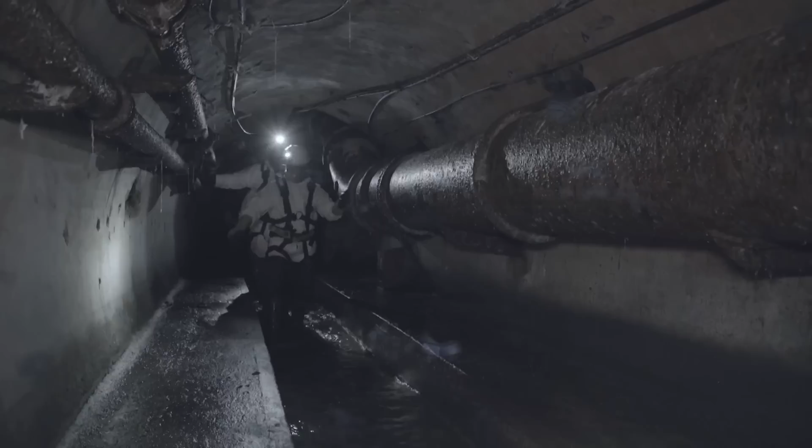This underground labyrinth spreads over 2,600 kilometers, the distance between Paris and Moscow. Hidden and mysterious, and completely unknown to most Parisians. It's a city beneath the city. Actually, underneath each street in Paris, there's a sewer that's accessible. It feels like entering the bowels of the earth.

Like the city above, the pipes below are always on the move. Every turn of a tap, every flush of a toilet, every minute of every day, Parisians depend on the waste they take away and the fresh water they provide. How does it all work so seamlessly?

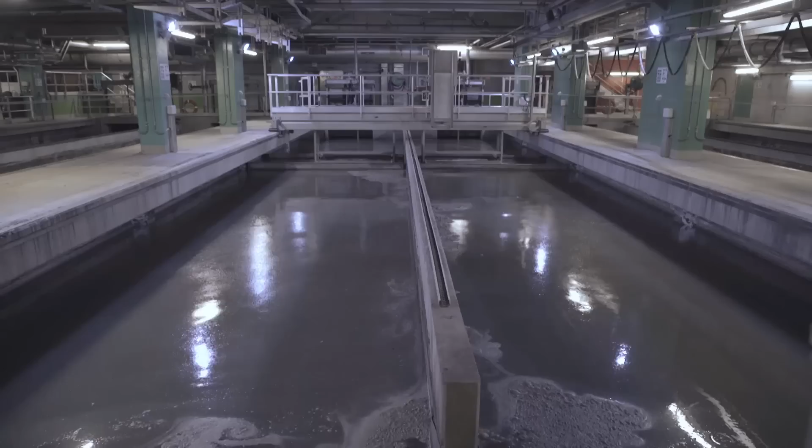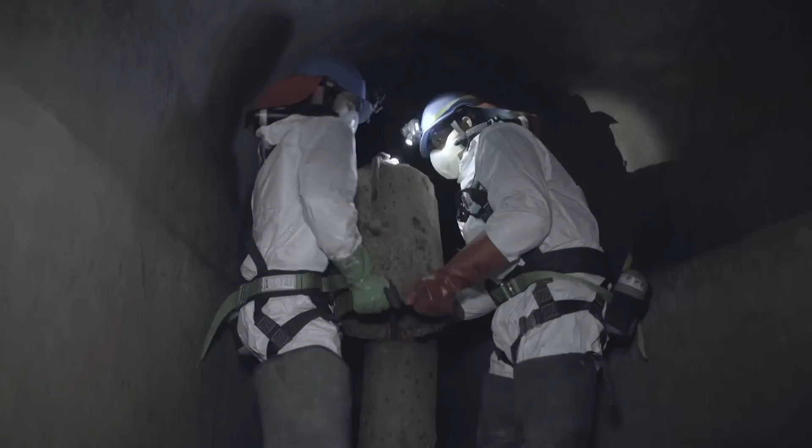Now, thanks to unprecedented access and computer-generated imagery, you're about to discover the secrets of the Paris sewers, where close to 6.5 million cubic meters of wastewater travel daily, equal to 70 Olympic-sized pools per hour. This massive infrastructure demands extraordinary equipment. From high-power flushing systems and huge reservoirs to century-old boats designed to clear sand.

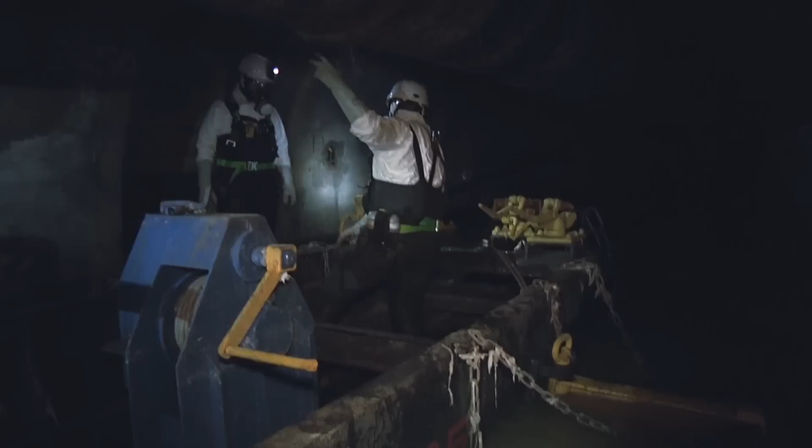The sewers are an undeniable part of the technical and urban legacy of Paris. The know-how and these extremely advanced constructions and machines have withstood the test of time. Since its creation in the 19th century, the modernistic sewers have transformed to keep pace with the vital city above. Witness the elaborate techniques designed to deal with flooding, heavy rainfall, and provide high-speed decontamination.

Nowadays, thanks to accelerated techniques used inside the plant, we're able to treat wastewater in just a few hours. From the collection of rainwater and wastewater to the distribution of drinking water, your sewer tour will take you on a fascinating behind-the-scenes adventure in history and technology. Deep inside the bowels of Paris, without getting your feet wet.

Every day in Paris, more than 2 million residents flush their toilet, clean their dishes and clothes, and take a shower. All this domestic water ends up in the sewers. This amounts to over 6.5 billion liters of wastewater that must be evacuated each day. Every hour, the equivalent of 70 Olympic-sized pools flows inside this invisible yet gigantic infrastructure.

In fact, the sewers are a network of tunnels mirroring the layout of the streets and boulevards above the ground. In total, 2,600 kilometers of galleries meander underneath the city. If they were put end to end, the sewers would cover the distance between Paris and Moscow. This extraordinary infrastructure serves several purposes. On top of collecting wastewater, these tunnels gather rainwater and prevent the flooding of Parisian streets when heavy storms occur.

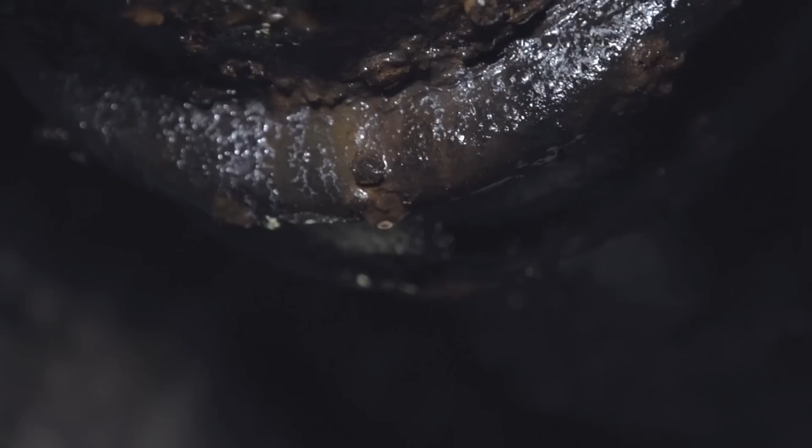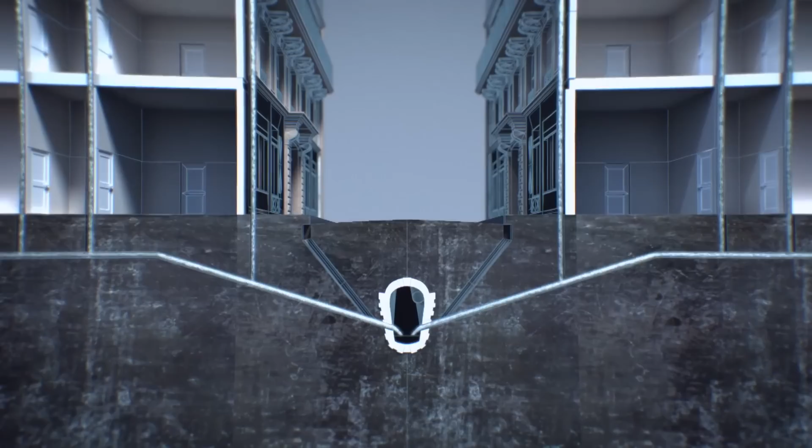This network also plays a crucial role in providing drinking water to local residents. The underground galleries host a 2,000-kilometer network of pipes distributing drinking water to every Paris household. Once used, this water returns in the sewer system located only 3 meters underground. Each building has its own evacuation outlet connected to a primary sewer that's about 1.3 meter wide.

This first link of the sewer chain then reaches a sub-collector. The latter flows in a main collector between 4 to 6 meters in diameter, located under the big Paris boulevards. This system can be compared to what you have in nature, such as a source, a small brook flowing into a river until it reaches the sea. It uses the exact same process: the elementary sewer collects wastewater from a single outlet before flowing into a collector and finally reaching the sea, which is represented by the water treatment plant.

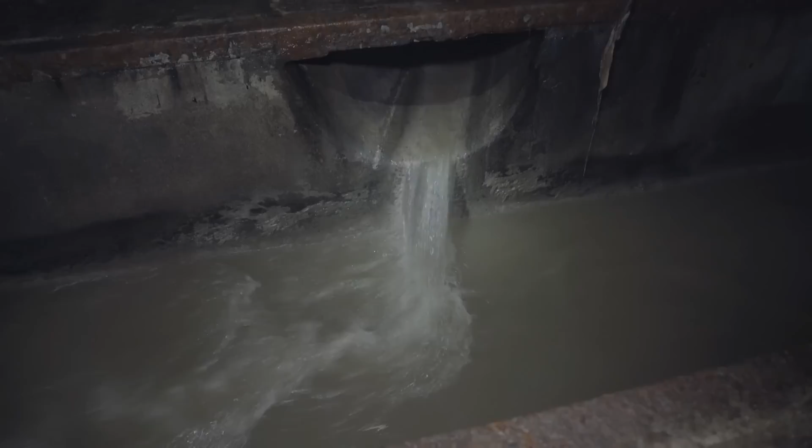The mission of the sewer system is to evacuate the wastewater of over 2 million Parisians, 24 hours a day, 7 days a week. In order to maintain this hidden network, city workers go inside the sewers on a daily basis. Sewer workers access the tunnels through one of the 20,000 manholes scattered across the sidewalks of the capital. Each lid weighs over 80 kilos.

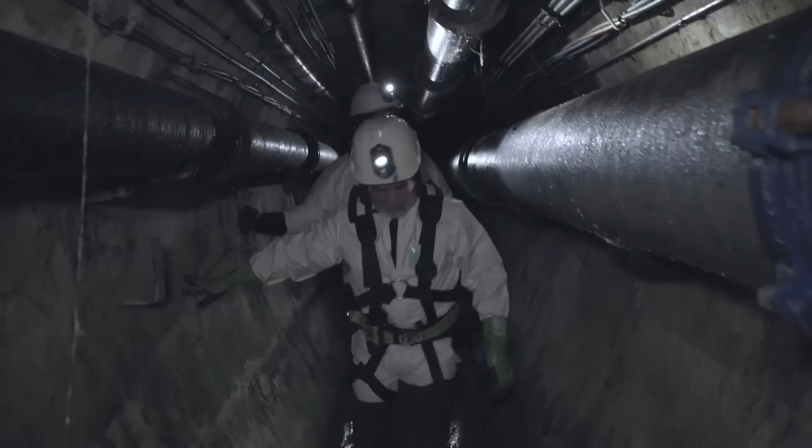Under the pavement, workers find themselves in a confined space ruled by darkness and humidity. This hidden and mysterious part of Paris is completely unknown to most of its residents. At first glance, the sewer network looks like a maze of alleys and narrow pathways. But in essence, this huge infrastructure is just a mirror of the city streets. Each street, avenue, and boulevard has its counterpart sewer tunnel. This 2,600-kilometer network provides every Paris building with a direct link to this intricate universe.

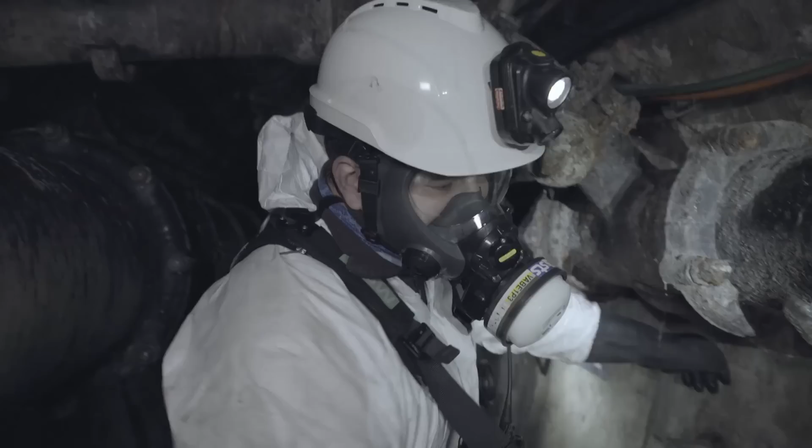Right now, we're under Rue Alésia. As you can see, sewer workers install signs to serve as bearings. Every building found above ground has its equivalent inside the sewer system. Here, we're under number 61 and 63. These are the two building outlets. Someone probably flushed their toilet or used water from this section of the building, which is now being collected.

Paris has a total of 100,000 such connections, linking every building to the sewer system. Wastewater from each building is gathered in a single evacuation pipe before being discharged in the sewers.

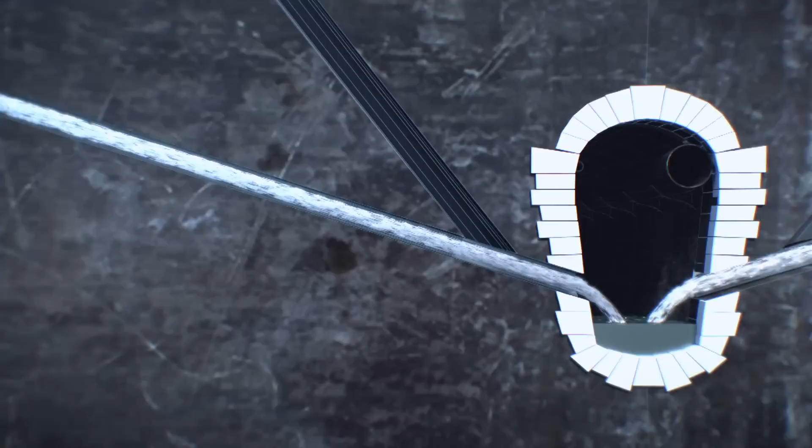In Paris, some 300 sewer workers are responsible for the safe flow of wastewater. Every day, they walk inside the bowels of the capital in order to maintain this gigantic network. These galleries are part of the historical heritage of Paris. They were designed over 150 years ago.

In the beginning of the 19th century, wastewater drainage was fairly rudimentary. As a result, whenever heavy rains would fall, black water would flood the streets, releasing a foul smell. Paris was at the mercy of the Seine River.

So in times of floods, the river would commonly rise through people's cellars and the sewers, which caused the water to pour out onto the streets, carrying garbage, filth, and all the disgusting things traditionally found in urban settings.

In the early 1800s, Paris only had a few dozen kilometers of sewers at its disposal. There were hardly any sewers. Moreover, they were poorly designed and maintained. As a consequence, the city was, according to its residents, unpleasant for both the eyes and the nose.

The poor drainage of wastewater caused several cholera epidemics, killing thousands of Parisians. This dire situation needed to be addressed. The sewer revolution started with the arrival of Napoleon III and Prefect Haussmann. The city underwent an unprecedented transformation, both on the surface and under it.

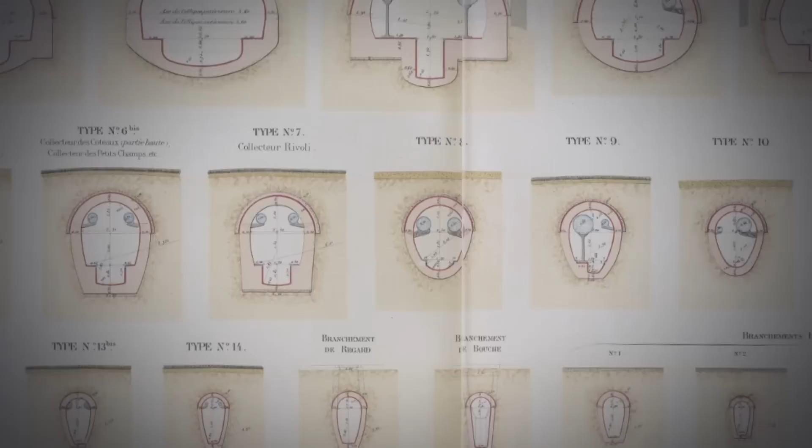To clean Paris, Prefect Haussmann entrusted visionary civil engineer Eugène Belgrand with this ambitious mission. Belgrand's goal was to drain black water through a gigantic underground sewer system. Belgrand's idea was to develop an underground city planning far more advanced than before.

He wanted to dig underground galleries able to collect a large amount of water, and in doing so, to develop a city on 2 levels. The scale of his project was quite utopic.

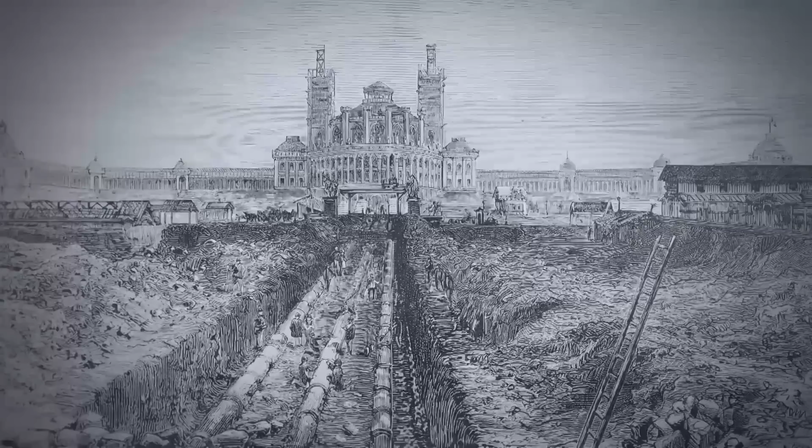To see their mission through, Haussmann and Belgrand undertook colossal work. Every street of Paris was successively ripped open and tunnels were dug. The work stretched over several decades and forever changed the face of the capital. By designing this huge underground infrastructure, Eugène Belgrand revolutionized the Paris sewers.

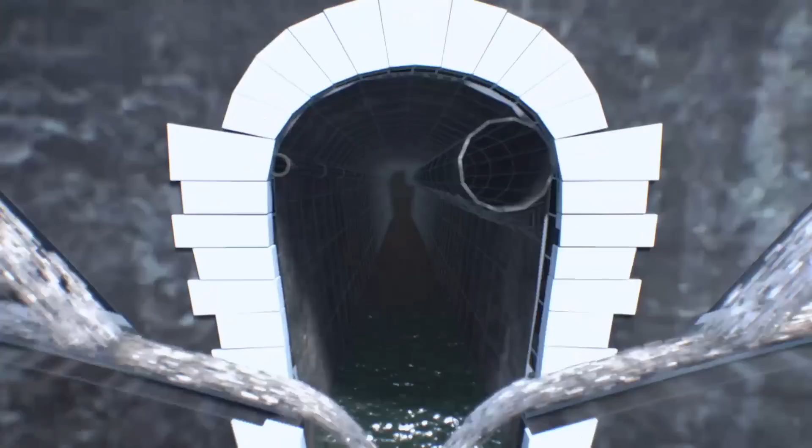The system works automatically, relying on the principle of gravity, and without any mechanical action. The use of gravity, therefore, makes pumping unnecessary, which is a very expensive and tricky system to maintain. Another feature that was unique in the world is that all the galleries were accessible, allowing sewer workers to walk freely along them.

Belgrand was a visionary. He established his work's dimensions based on his prediction for Paris's growth and influence on the rest of the world. That's why he designed large, accessible sewers, which facilitated the maintenance work. A blocked pipe requires a lot of disruptive work above the ground. But when the sewers are accessible, we can go inside, take action, and find the source of the problem.

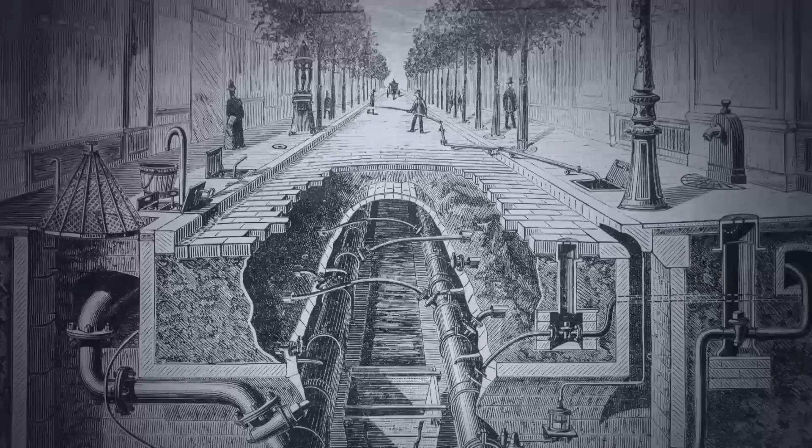In just a few decades, Belgrand and his successors accomplished colossal work. They built hundreds of kilometers of sewers, allowing the discreet drainage of rain and wastewater.

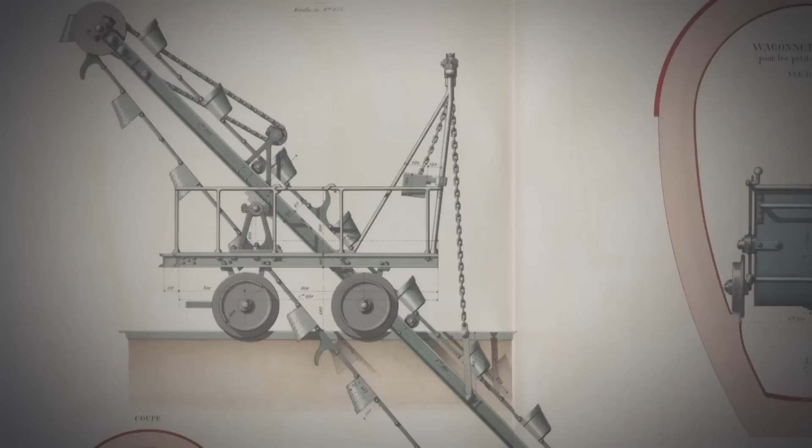But that's not all. In order to maintain and prevent waste matter accumulation inside this gigantic network, Belgrand had an original idea. He imagined a unique, spectacular system: cars and boats designed to travel inside the galleries and scrape the bottom of the sewers.

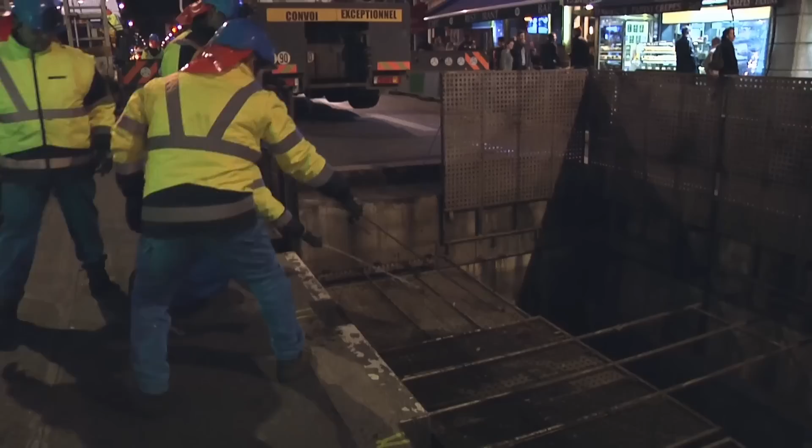To this day, sewer workers use these huge vehicles to go down the city's main collectors. Gate boats weigh almost 7 tons and measure 10 meters in length and 2 meters in width. This delicate operation is usually done at night to avoid disrupting city traffic. It takes 6 hours to lower a beast this size. Once inside the sewers, the scrubbing operation can begin.

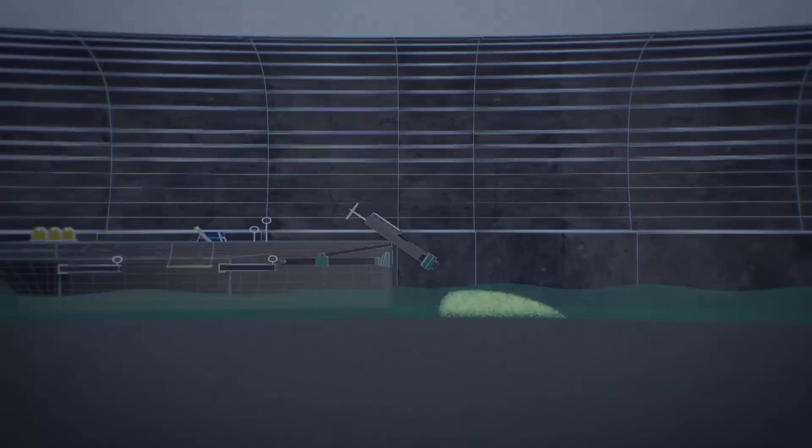When the boat comes to a heap of waste matter, it's blocked. Sewer workers then lower the gate. Moored with chains, the boat is lifted under the effect of rising water coming from the back. When the level of water is sufficient, the gate is swiftly opened. The flowing water removes the deposits and pushes them forward inside the tunnels.

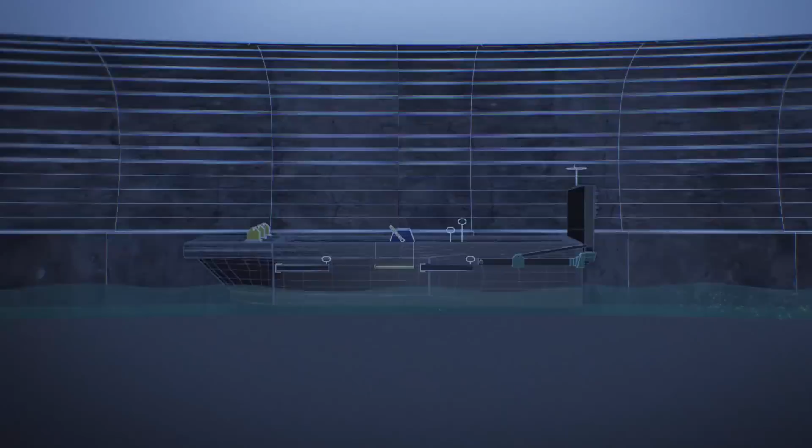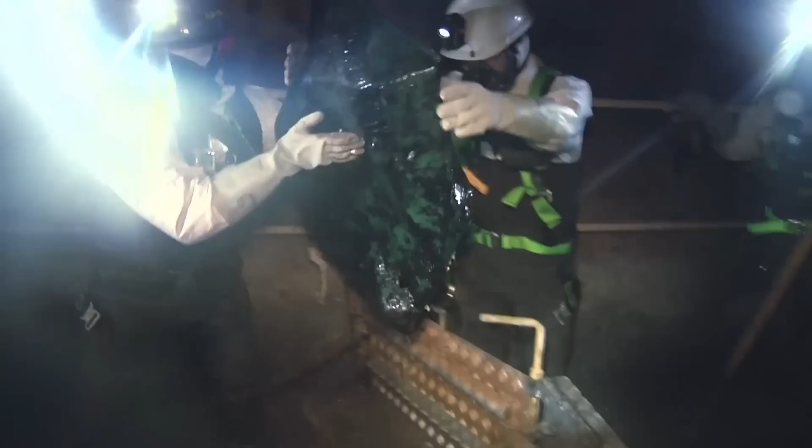This is how the boat makes its way inside the collector, stopping each time a heap appears or when it's blocked by any unusual object. Inside the collectors, sometimes we find wheelbarrows left behind by construction workers, cinder blocks, car tires, or tree grates like those you find around the trees in Paris. I don't know how they end up in the sewers, but we find them quite often.

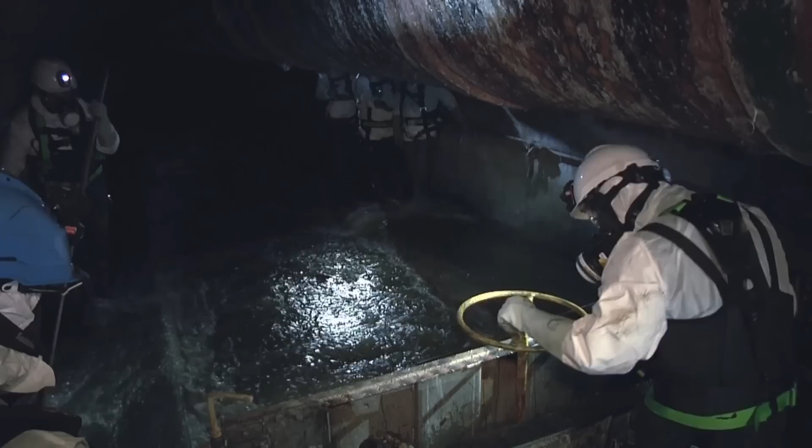In use since the 1920s, these unique gate boats are part of the historical legacy of the Paris sewers. We've tried many different things inside the biggest collectors, where the current is strong, and so far, nothing's worked better than the original gate boats. Several months a year, sewer workers navigate a dozen gate boats inside the network of main collectors.

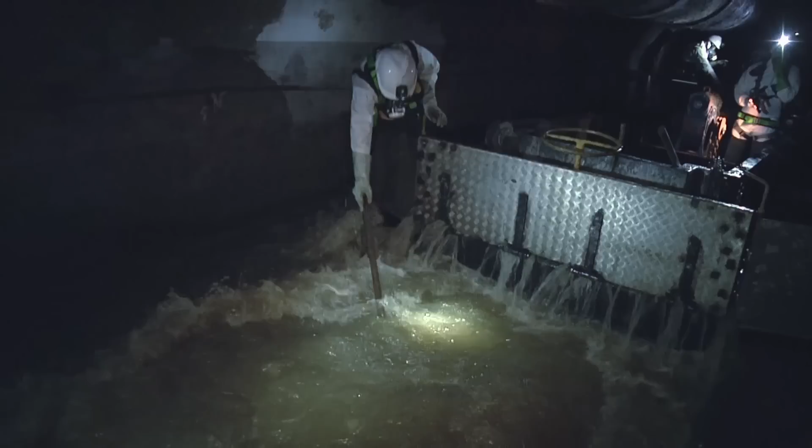This operation is very delicate. It requires the participation of 7 workers who must remain alert at all times in a noisy environment. The workers take turns during the entire operation. For example, the chains in the back of the boat weigh 80 kilos, so it's very demanding physically. It may not seem like it, but operating the gate is super hard.

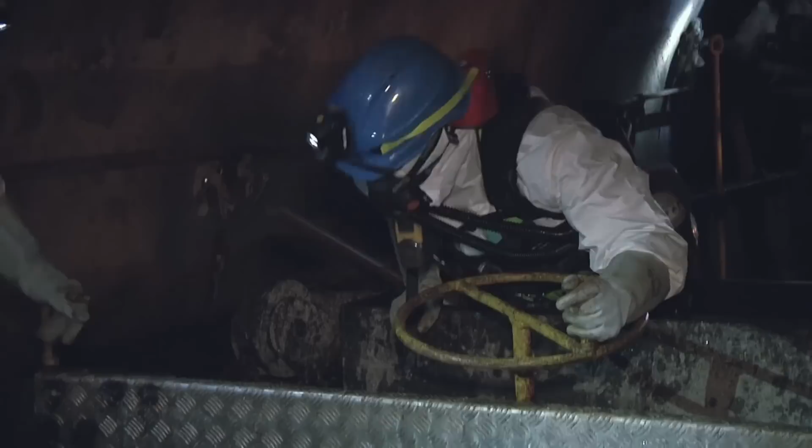Gate boat crews are actually navigating a 5-ton vehicle under the thrust of water. If they slip up and the boat starts going, it can't be stopped. The job requires a high skill level. These huge gate boats have been navigating inside the bowels of the capital for over a century. As it moves forward at a speed of 30 meters a day, the gate boat pushes the waste matter towards a sand trap.

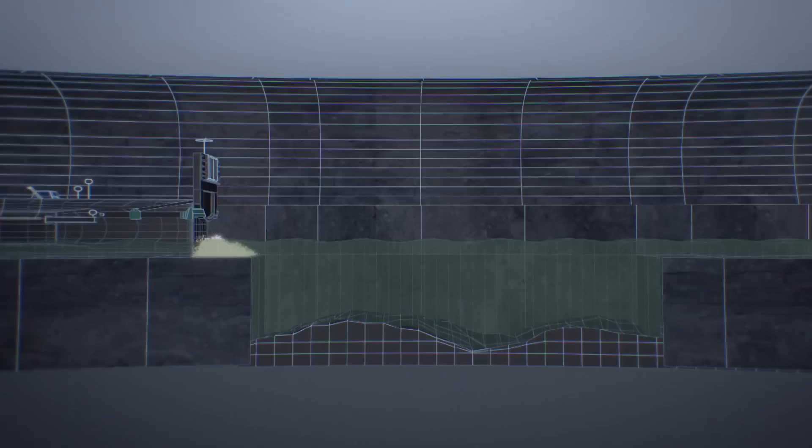About 100 such reservoirs can be found along the main collectors under the boulevards of Paris. On a regular basis, these huge sand traps are dried, emptied, and all the sand is sent to the waste process plant. The main goal is to maintain a quality network that works hydraulically. Every year, gate boats clear up close to 6,000 cubic meters of sand, which could almost fill 2 Olympic-sized pools.

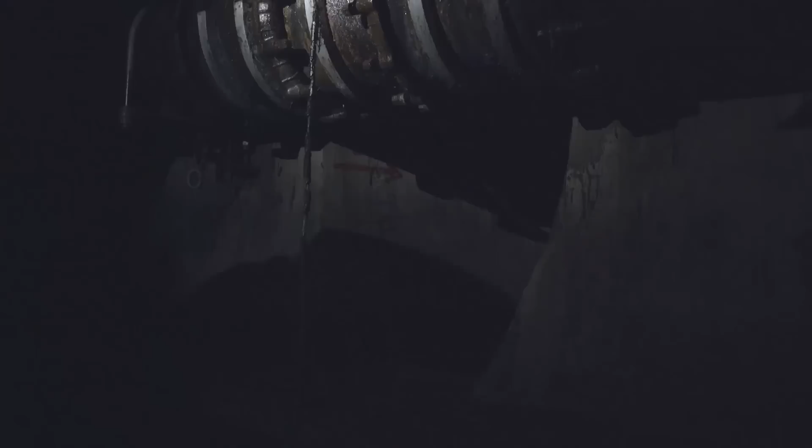Thanks to the visionary genius of its creator, its great dimensions and regular maintenance, the sewer system has successfully lasted over a century. The men working in the sewers today carry out the same operations their colleagues did 100 years ago. However, their protective gear has been improved, as the sewer environment can be dangerous.

Inside these dark, confined sewers, the main danger is invisible. In some places, solid substances accumulate and decompose, thus creating potentially lethal gases. One of the most dangerous is hydrogen sulfide, which stems from the decomposition of organic matter. But there's also carbon monoxide and methane, a highly flammable gas.

Whenever the presence of gas is detected, developing accurate reflexes is vital. Sewer workers must precisely know how to use their protection gear. To that end, they go through rigorous simulation drills on a regular basis. A control box sets off an alarm after detecting the presence of abnormal gas. In order to shield themselves from this potentially deadly gas, workers must put on their masks as quickly as possible and protect their respiratory systems.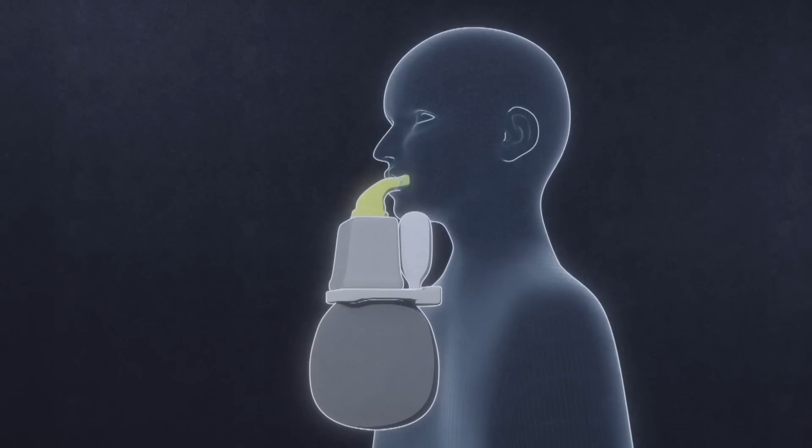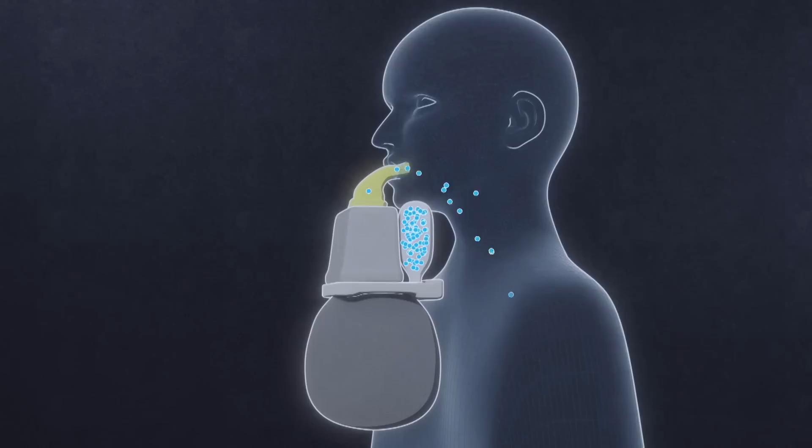They're equipped with self-rescue masks that provide them with 30 minutes of air supply, which is more than enough time to exit the sewer. These emergency masks come with a small compartment containing a supply of compressed oxygen. As soon as the mask is in place, the oxygen is released, allowing the user to safely breathe through a self-contained device without any outside air supply. This great innovation ensures the survival of workers when confronted with lethal gases.

Between suspended matter, gases, bacteria, and fungi, the dangers are many. Our biggest enemy inside the sewers are gases and bacteriological hazards. We're working inside a huge pipe filled with feces, filth, and many other horrible things. Breathing it in or being in contact with it involves serious risk. It's an extremely difficult job.

These days, sewer workers are not the only ones working inside the bowels of the capital. Other technicians also go down these tunnels. The sewer system doesn't only drain wastewater, it also serves as a technical gallery, hosting the internet wiring and streetlight power cables. What's even more surprising is that it hosts the entire city's drinking water supply line.

These drinking water lines are installed on the roof of the underground galleries. In total, a 2,000-kilometer piping network runs across the sewers in order to supply each and every building. This parallel network was designed and conceived at the same time as the creation of the modern sewer system 150

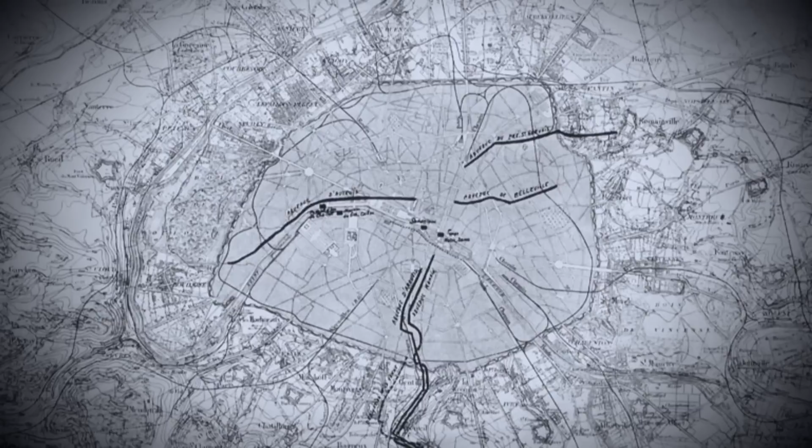Eugène Belgrand, who was responsible for creating the sewer system, was also tasked with the mission of bringing drinking water to the heart of Paris. To achieve this, he imagined an entirely connected, complex network. The engineers started by locating several water sources within a 150-kilometer radius around the city. But drawing water was not all. It needed to be transported all the way to Paris.

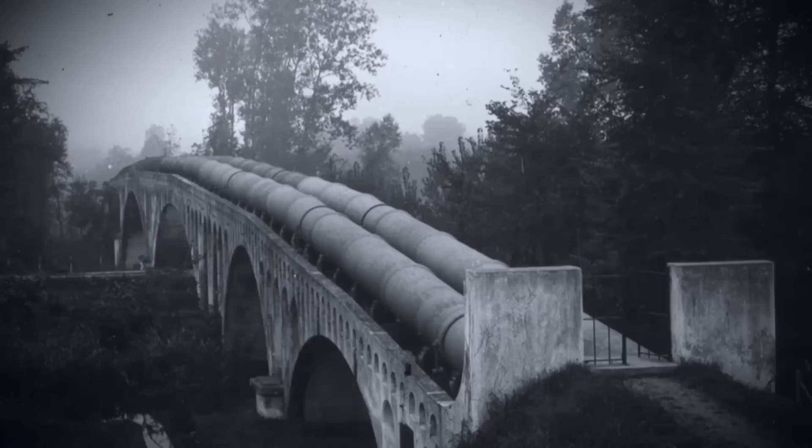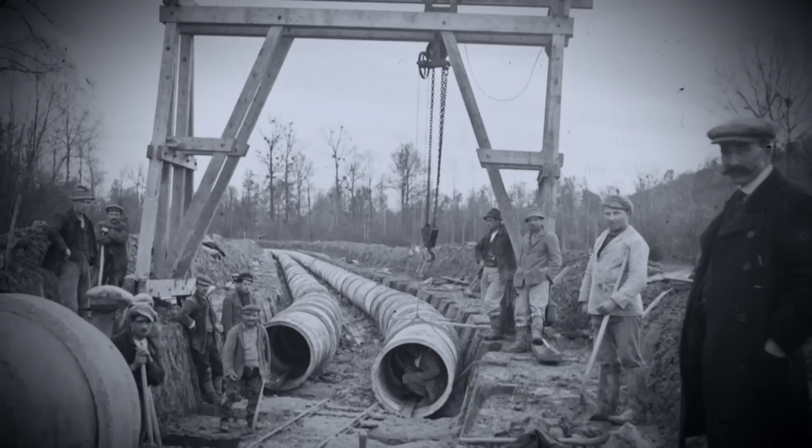Inspired by the Romans, Belgrand had a gigantic aqueduct network built in order to carry water over huge distances. In these monumental structures, the water simply follows the natural inclination of the land until it reaches the bottom of the Paris area. It flows from the source under the action of gravity, all the way to the edges of the capital. Then, the water runs along the pipes inside the sewer network.

Belgrand used the principle of gravity. In other words, the water flowed towards Paris because it came from a higher ground. He used the topography of the Parisian area, which was not only relevant, but it also contributed to the system's resilience, as evidenced by the fact that it still provides half of the water consumed in Paris.

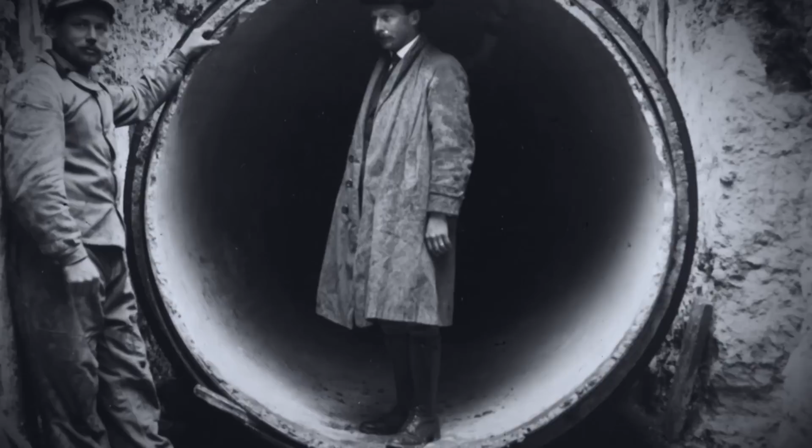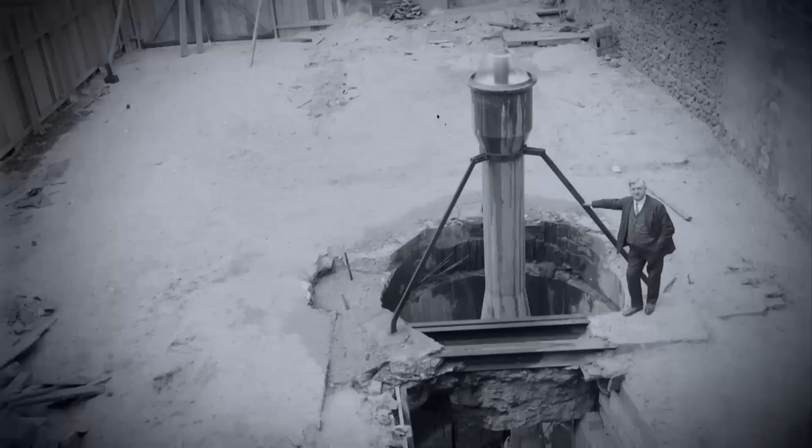This colossal worksite, built in parallel with the construction of the Paris sewers, lasted about 40 years. The work was completed well after Belgrand's death in the early 20th century. The work accomplished by Belgrand and his successors is remarkable. In total, 470 kilometers of aqueducts were built. To this day, these structures bring water drawn from about 100 intake points all around Paris.

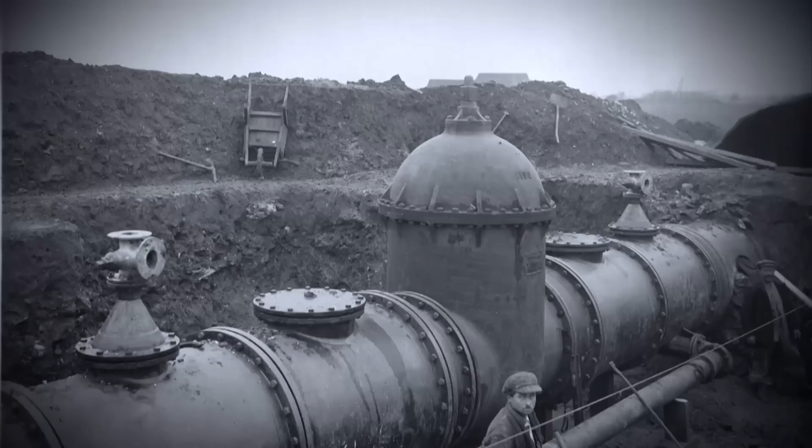Finally, the drinking water is distributed to Parisian households, thanks to some 2,000 kilometers of pipes installed inside the sewer network. At the time it was designed at the end of the 19th century, this unique network, used both to drain wastewater and to distribute drinking water, was a genuine innovation. The most remarkable thing about Belgrand's system is its longevity. To this day, Eau de Paris uses the network that was designed and built by Eugène Belgrand and his successors.

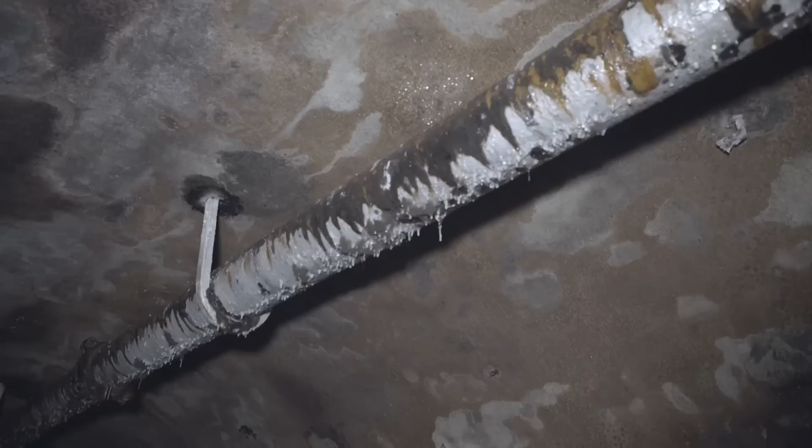Today still, the sewer network plays a key role in the distribution of drinking water across the capital. This joint system offers a tremendous advantage, as the pipes are accessible from inside the tunnels. In the event of leaks, or simply to maintain the pipe network, the city doesn't have to rip the streets open or hinder traffic. City workers have direct access to the sewers.

The drinking water pipe network hangs from the ceiling. Water travels inside 2,000 kilometers of pipes inside the sewers, distributing water to every building and fire hydrant. Every so often, the pipes start to leak and need replacement.

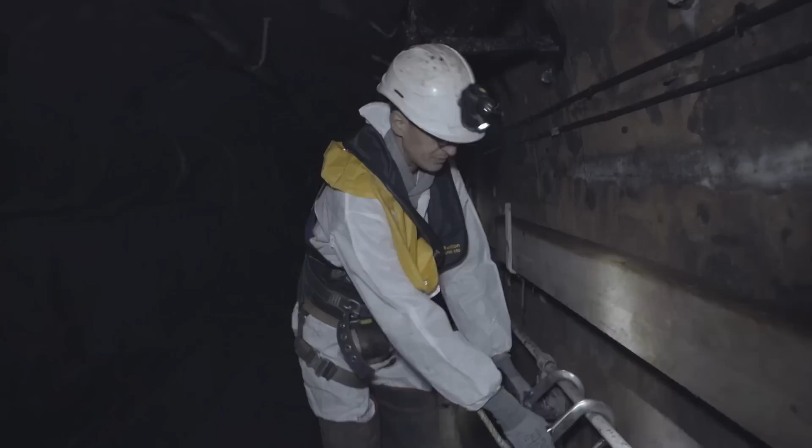Despite the proximity between the drinking water and wastewater networks, there is a zero risk of contamination. The pipe is under pressure along its entire length. There are no weak spots. We're absolutely positive that nothing can enter the pipe. No foreign body can get inside.

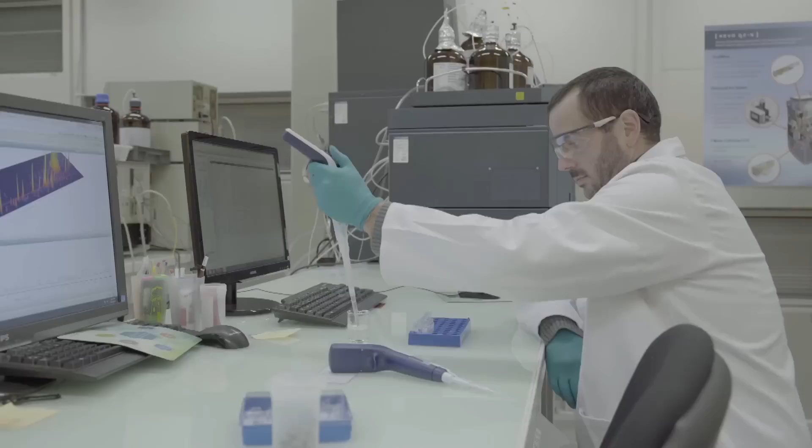Water is the most closely monitored consumer good in all of France. In Paris only, it undergoes over 1 million tests every year. These are done through all the stages of the distribution, well before the water reaches the sewers. Every measure is taken to ensure water of the highest quality.

Before traveling inside the sewer system and reaching Parisian households, the water undergoes a series of treatments. Some are done here at the water treatment plant of L'Haÿ-les-Roses, just south of Paris. This gigantic facility collects underground water from the Sens region. The state-of-the-art plant produces 110,000 cubic meters of water every day, which amounts to 1/5 of the capital's drinking water needs.

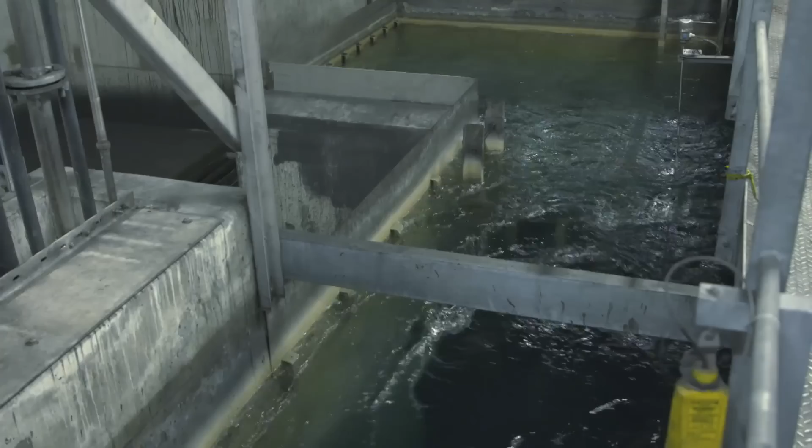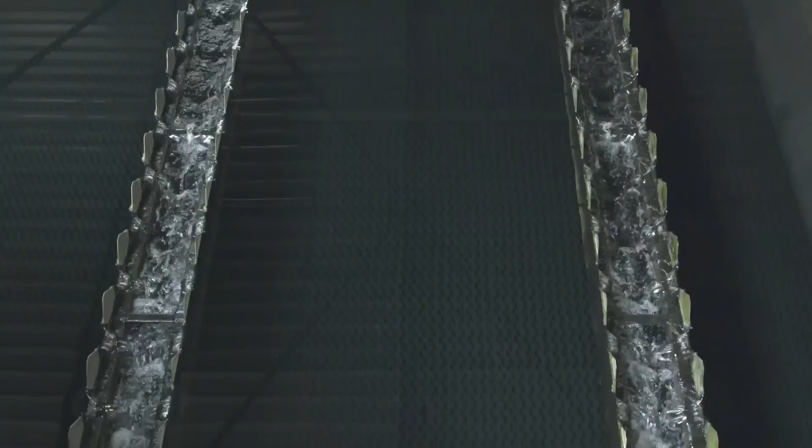When it reaches the plant, the water seems clear. However, it contains several substances invisible to the naked eye and potentially hazardous to our health. The water is already clear, but it's not clean enough to drink. In fact, it contains materials such as ground minerals, bacteria, and parasites. These elements, together with pesticides, will be eliminated through a thorough treatment process.

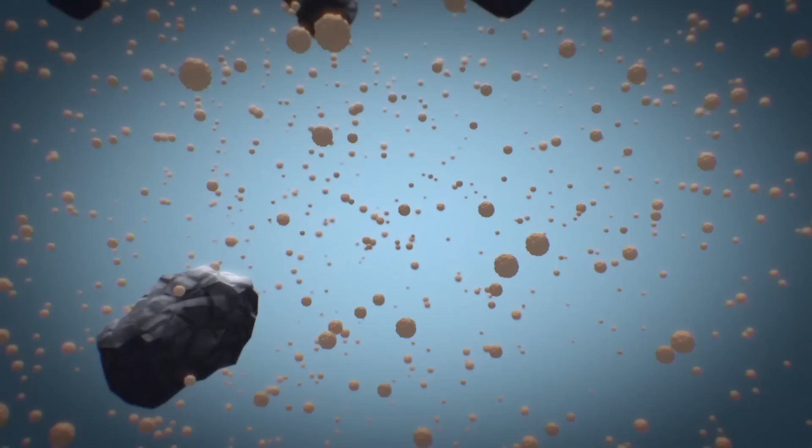The first part of the treatment involves pouring the water inside huge tanks saturated with carbon powder. Active carbon is highly porous and attracts, just like a magnet does, a great number of suspended particles, such as pesticide residues. The water is then relieved of these substances through a settling process before being sucked up and sent to the second stage of purification.

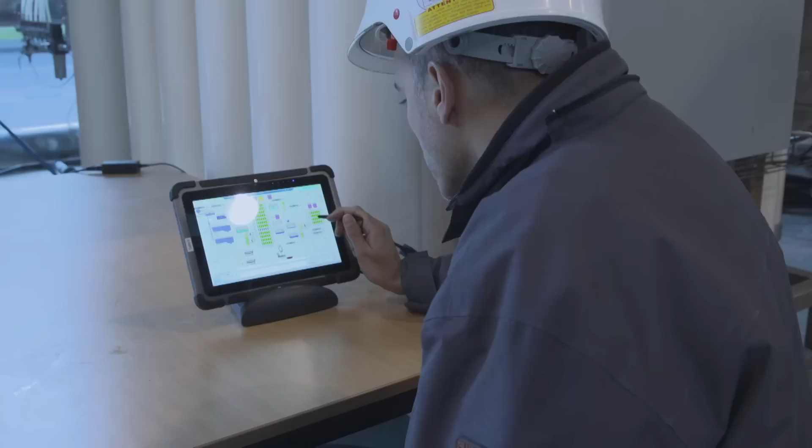When water reaches this gigantic room, it's pushed under high pressure inside one of these white units. This is the ultrafiltration stage. Ultrafiltration is actually a mechanical filtration. In other words, it uses the same principle as a sieve or a coffee filter, but in this case, the mesh is very small, only 0.01 micrometer. This means we catch any particle bigger than 0.01 micrometer.

Each unit contains about 100 tubes. These tubes are made of punctured membranes. The hole size is 0.01 micrometer, which is 10,000 times smaller than skin pores. That means no bacteria, virus, parasite, or any organism can go through this barrier.

The total surface area of this ultrafiltration plant equals 66,000 square meters, meaning that our process is highly concentrated. If we were to build it with a different technology, the equivalent of this room would require a surface area between 60 to 70 soccer fields, which is substantial.

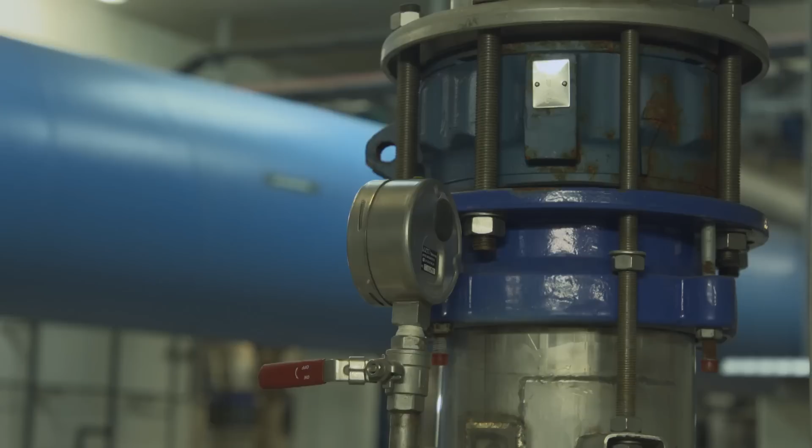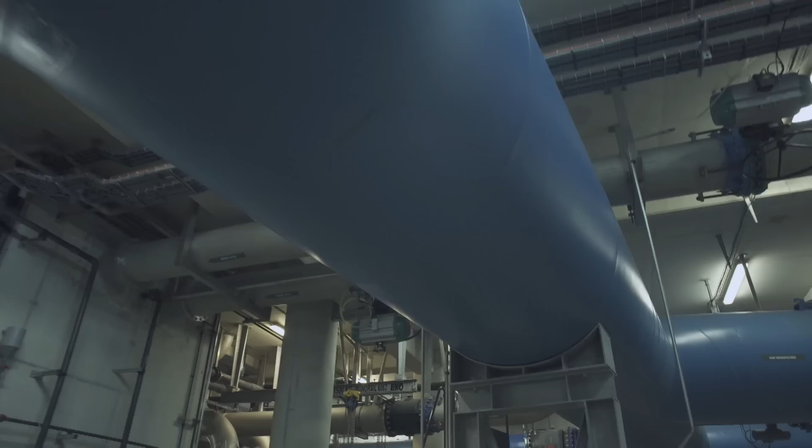After this stage, the water is almost drinkable. It has been freed of all the undesirable substances, but it still contains minerals. During the last step, a small amount of chlorine is added. This will preserve the water quality during the entire time of its storage and transportation. This step is absolutely necessary before the water can travel inside the pipes across the gigantic Paris sewer network.

Nowadays, half of the water consumed by Parisians comes from underground sources treated in purification plants located close to the aqueducts. The other half is drawn from the surface waters of the Marne and Seine rivers, which are also treated in plants surrounding the capital. By multiplying the supply sources, Paris is able to meet the needs of all of its residents.

This creates an extremely strong and resilient system while ensuring its resistance in the event of a crisis. This is all thanks to the 5 different vectors made up of 3 underground sources and 2 surface waters, the Marne and the Seine rivers, allowing us to produce twice the actual daily needs of Parisians.

When it comes out of the treatment plant, the water hasn't reached its destination yet. Before traveling along the sewer network to be distributed inside the homes, it has to be stored in one of the 5 main reservoirs of the city. These are huge covered pools, and the most emblematic is located in the 14th arrondissement.

Under this land spreading over 3 hectares, the equivalent of 4 soccer fields, hides one of the most important water reservoirs of the capital, the Montsouris Reservoir. Away from prying eyes, this unique pool is shielded from light and pollution in order to protect water quality. Access to this sensitive strategic location is strictly restricted, and most Parisians are unaware of its existence.

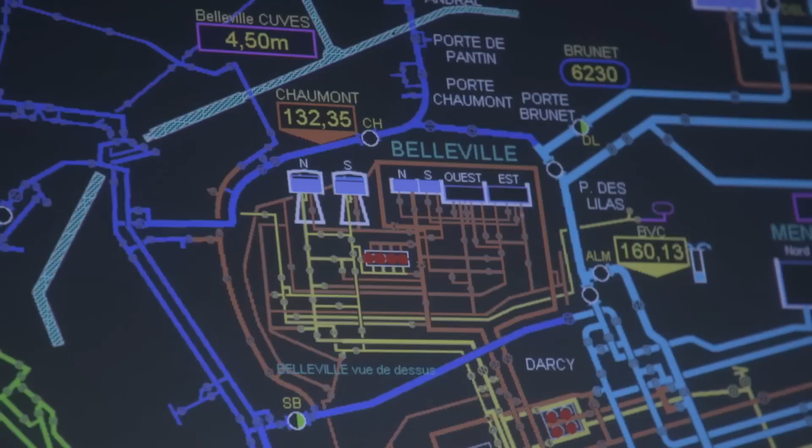In this ultra-secure room, agents remotely coordinate drinking water stocks allocated to the capital. They monitor the entire network in real time, including the 2,000 kilometers of underground pipe network within the sewers of the city. Inside this control tower, the dispatchers take turns 24 hours a day to meet the needs of the Parisians.

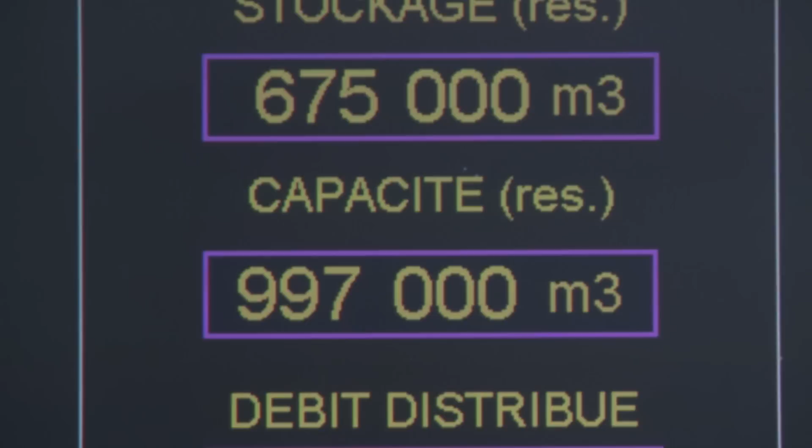Here, we process 19,000 variables, which amounts to millions of data points each day, and we're able to remotely control most of the facilities. On a daily basis, our dispatchers open the gates inside the network to increase pressure, fill reservoirs, and allow a more efficient storage. Their only goal is to ensure water distribution to every Parisian at all times, 24 hours a day.

On top of ensuring constant distribution of drinking water, the agents must also guarantee an even pressure in every faucet, which is set at a minimum of 2.5 bars. In the lowest neighborhoods of Paris, this pressure is reached naturally, since the reservoirs are located on higher grounds. The water flows directly under the effect of gravity. It's very environmentally friendly, as we don't need any driving force to push the water and guarantee its pressure.

In Paris, most reservoirs are situated on high ground at an altitude of about 25 meters. At their outlet, water is released at a pressure of 2.5 bars in the pipes located inside the sewer network. This pressure is sufficient to distribute the water to the buildings of the lowest neighborhoods of the city, all the way up to the 7th floor. Each day, close to 500 million liters of water are dispensed all around Paris.

On top of managing the drinking water, the Eau de Paris agency also ensures the distribution of non-drinkable water across the capital. This water is drawn directly from the Seine River and the Canal de l'Ourcq. Once filtrated and rid of its plant residues, this raw water travels through 1,700 kilometers of pipes that are also tucked inside Paris's sewer network. This ingenious system is once again the brainchild of Eugène Belgrand. The distinctive feature of the sewers is to house a double underground network providing both drinking and non-drinkable water.

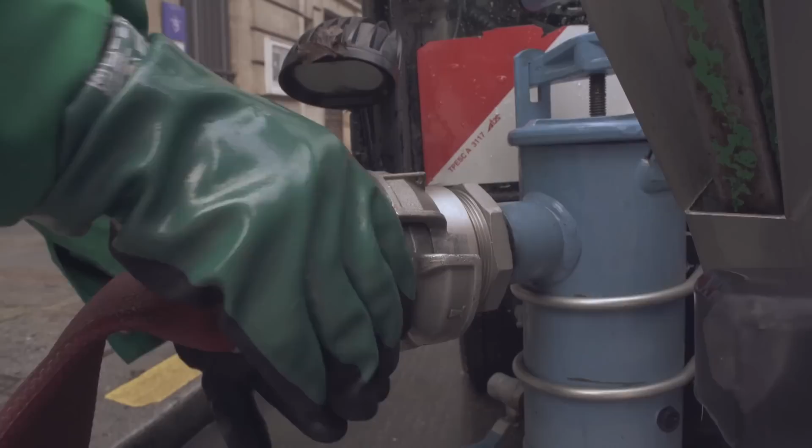The tourists who visit Paris are often surprised to see water flow along the sidewalks. They wonder what it's used for. They sometimes think it's being wasted. In recent years, we've been criticized on Twitter and told it was unacceptable to waste drinking water because it's a rare and valuable resource. But in reality, it's not drinking water. It's drawn directly from the Canal de l'Ourcq, or the Seine River. In that sense, it's very environmentally friendly since this water isn't wasted. It ends up in the sewers, where it helps evacuate black water.

The vast majority of the streets of Paris are on a slope. Therefore, the cleaning water flows naturally along the roads before ending up in the closest drain. This is how rainwater and cleaning water flowing inside the sewers facilitate the evacuation of wastewater. But it's insufficient to maintain the network, which is regularly blocked with sand.

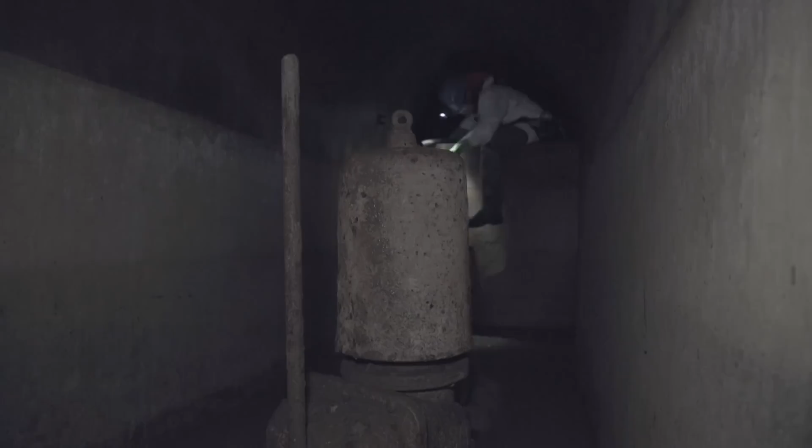On top of the imposing gateboats, another ingenious system was implemented at the end of the 19th century: a flush cistern. Several hundred tanks containing non-drinkable water are scattered across the network and regularly maintained by sewer workers. One, two, three, right here. Let's put it over there.

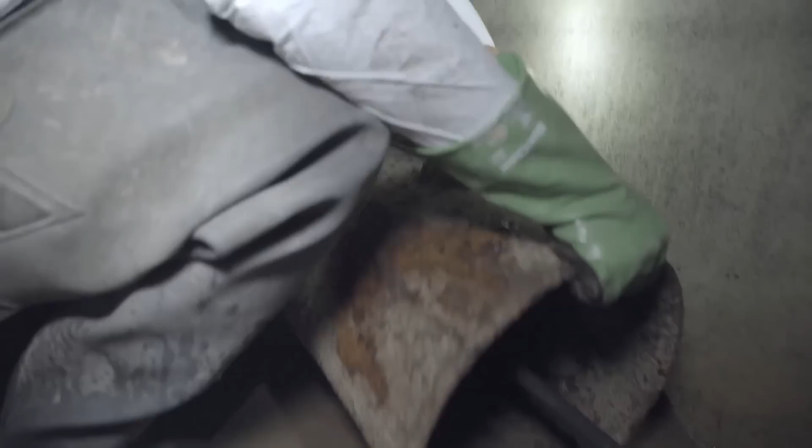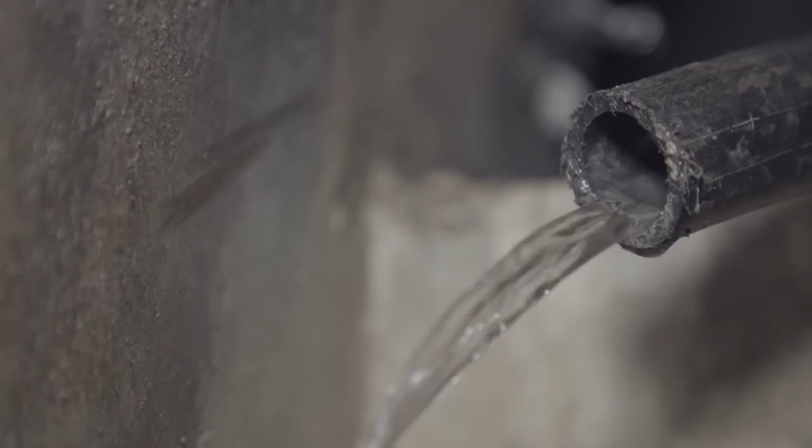It's a preventative measure to avoid potential organic matter deposits or rat traps. It creates a flushing action. It also contributes to better ventilation and keeping the tunnel generally clean, while helping the cleaning crews when they need to work on specific problematic sections.

Several times a day, these reservoirs fill up and release an average of 5 cubic meters of water. This fast, pressured water helps clear out the smaller sewers on a daily basis, while contributing to their cleaning. In fact, it's a bit like the one you have at home. It's basically the extra large version of a toilet flush.

Thanks to the water drawn from the Canal de l'Ourcq and the Seine River, the sewers are almost self-cleaned. The non-drinkable water network hence plays a key role in evacuating the wastewater through the 2,600 kilometers of tunnels underneath Paris. But when heavy rain strikes, water can become a dangerous enemy. When significant storms occur, all the rainwater falls inside the gutters and combines with wastewater to block the sewers. The water level can thus rise dangerously and saturate the network.

When it rains hard, rainwater is added to wastewater, and this can cause a flood. The tunnels are pretty large, but rainfall can still be very intense. And in that case, Paris could be flooded. So in order to protect the more vulnerable neighborhoods, a drainage system was designed a very long time ago to make sure that the excess water, named the overflow, is poured into the Seine River by what we call a spillway. Paris has 44 spillways, which are galleries linking the sewer network to the Seine River.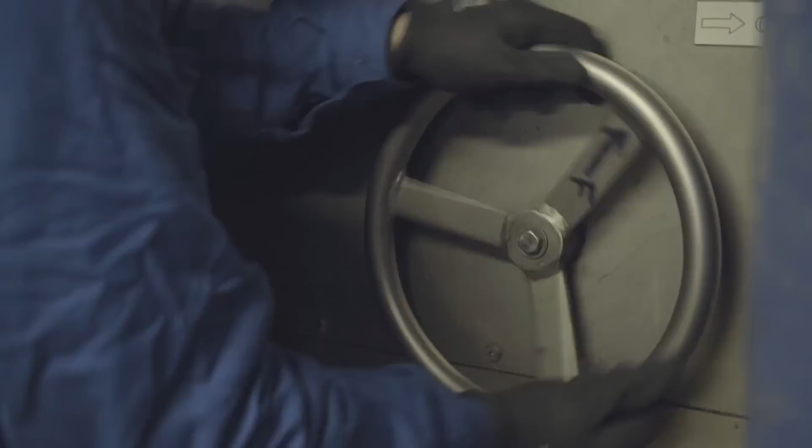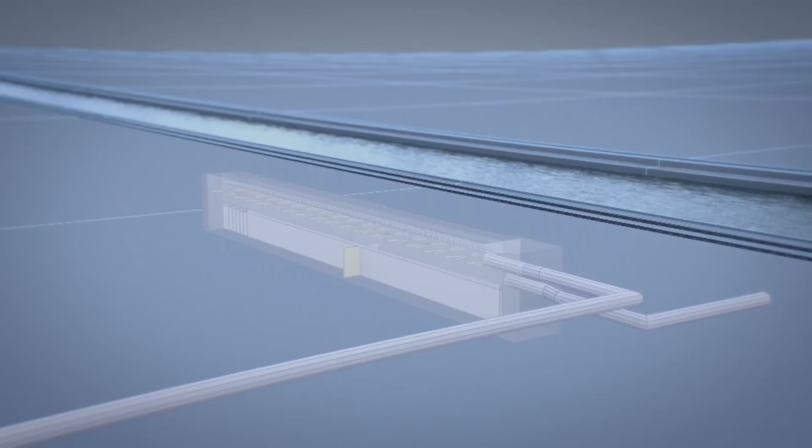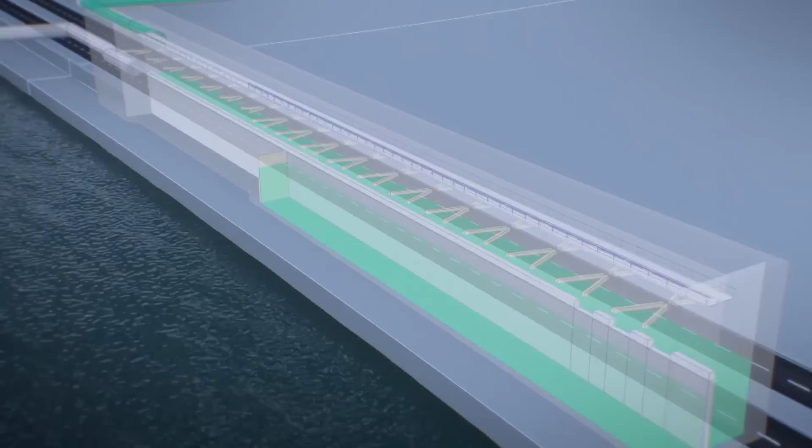Since wastewater is highly polluting, huge underground reservoirs were built in the 1990s to prevent the overflow of black water in the Seine. They're located along the river, like this one under Parc de Bercy in the 12th arrondissement. This gigantic storage facility comprises 4 compartments measuring 200 meters long and 13 meters wide. In case of heavy rain, the 4 pools can store up to a total of 17,000 cubic meters of water from the sewers, which is the equivalent of over 4 Olympic-sized pools.

After the storm, all this water simply returns inside the sewer network to be brought to the purification plant, where it will be treated under the appropriate conditions. Nowadays, every possible effort is made to protect the quality of the Seine River. Thanks to its many storage structures, Paris can keep over 142,000 cubic meters of wastewater in case of heavy rains, the equivalent of 38 Olympic-sized pools. Over the span of 20 years, this system has proved its worth. It has lowered the volume of water discharged in the Seine River by 90%. Today, environment protection is the #1 priority.

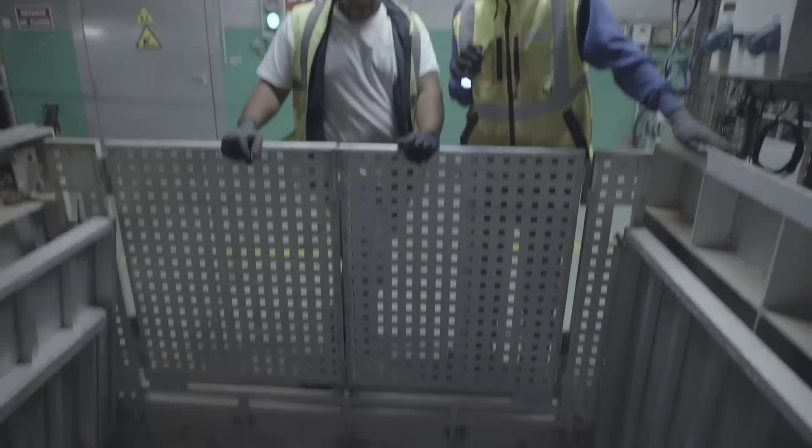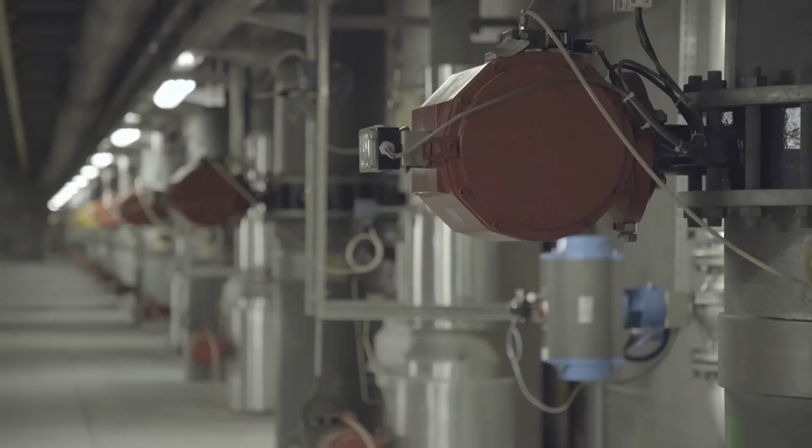At the end of its journey, after traveling through hundreds of kilometers of tunnels under the capital, the wastewater is transported to the plants located in the northwest of Paris. The sewer network reaches its destination in huge water treatment plants, such as this one in the city of Colombes. Every year, this gigantic plant treats the wastewater of over 1 million residents. One of a kind in Europe, it has the unique characteristic of being mostly buried. Indeed, 2/3 of the facility are hidden underground. Here, sewage water undergoes a real shock treatment.

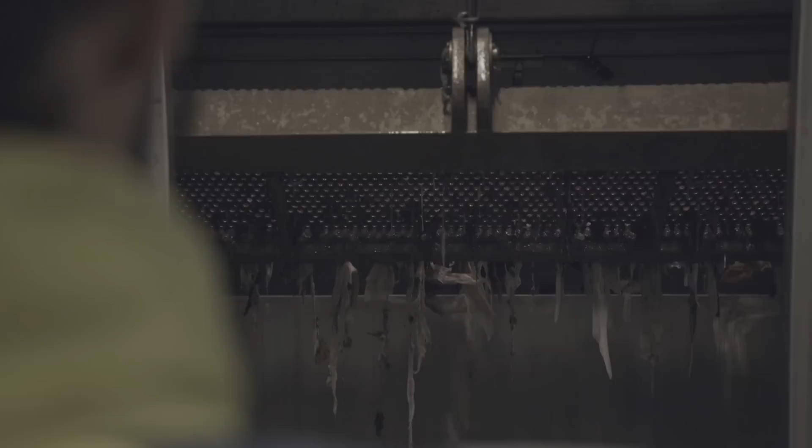The first step is to eliminate coarse waste such as plant residue, wipes, or pieces of plastic. All this trash goes through huge filters. These are meshes of various sizes that catch the waste, compress it, wring it out before sending it to a treatment plant. After going through the filters, the water continues on to huge settling tanks.

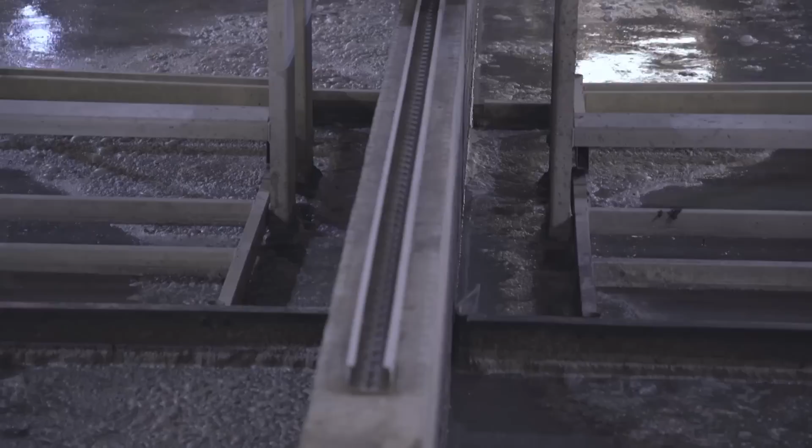In the Parisian region, there are construction sites all year round. This causes granulated materials and mineral deposits. The more general term is sand, which is retrieved in a desander. As we slow down the water flow, these materials settle at the bottom of the desander, where we retrieve them. These huge compartments serve 2 purposes. They allow workers to fish out the heavy sand sinking to the bottom of the tanks. And simultaneously, grease rises to the surface and is collected with enormous scrapers.

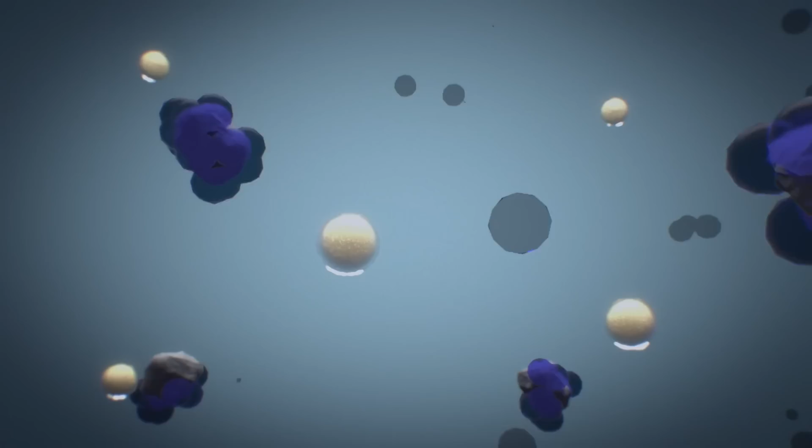The water is now rid of the more apparent waste. But it still contains numerous invisible substances derived from organic matter, such as carbon, phosphorus, and nitrogen. In order to capture these dissolved elements, water undergoes 2 types of shock treatments. A first chemical treatment captures the carbon and phosphorus molecules. Then, water is put into contact with millions of bacteria that digest the nitrogen found in urine. This step is called biofiltration.

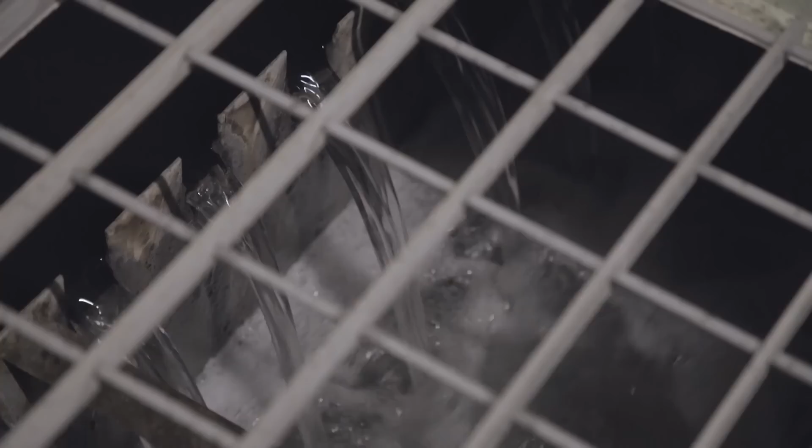After these chemical and biological treatments, the water is completely purified, and in record time. Each drop of water is treated in just 2 hours before being returned to the Seine River. The sewer system and the advanced performance of wastewater treatment both contribute to the improvement of the ecological state of the natural environment of the Seine and Marne rivers. Today, we notice that fish life is growing more and more as we discover new species every year.

Thanks to the improvement of purification techniques, the waters thrown back in the Seine River present no risk to aquatic life. Each year, several billion liters of water are returned to the natural environment. These days, the entire sewer system, from the wastewater collection to its purification, is studied in order to ensure the protection of the environment and possibly even change it into a reusable resource. What if sewage could become a source of energy?

For the longest time, sewage was a waste, and it had to be kept underground, which is why the system was designed this way. But today's reflections are a bit more open, and we consider that the sewer system could be used for things other than just evacuating waste, even though it must obviously maintain its primary function. When it comes to sewer systems, wastewater can indeed be used to heat buildings. By installing a heat exchanger in the sewers, it's possible to heat the nearest building through an adapted heating system.

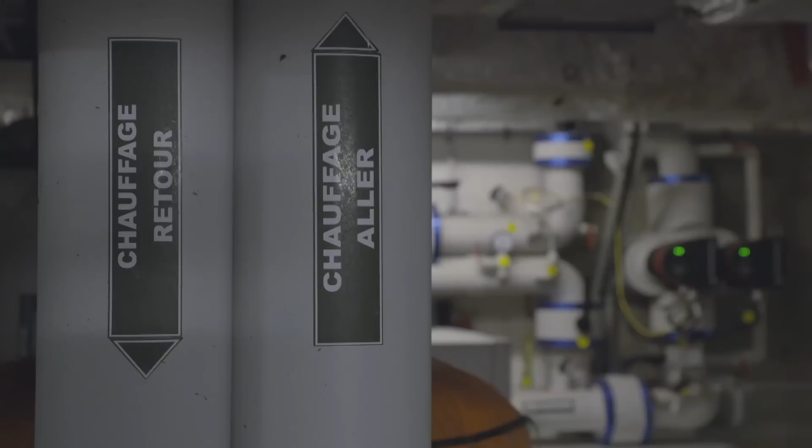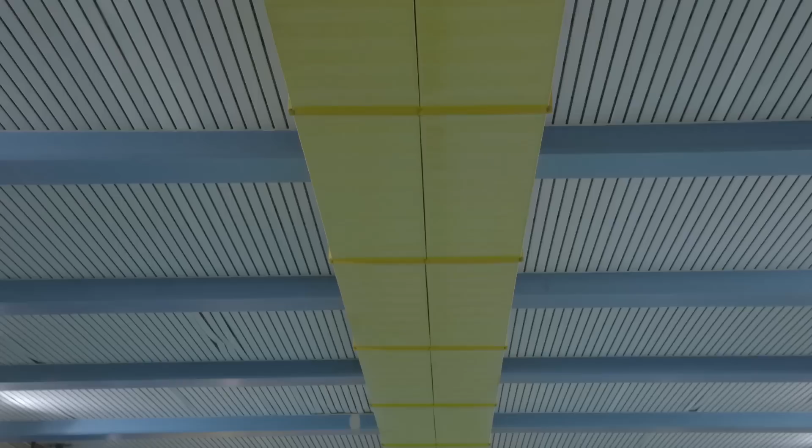Today, this ingenious system is notably used to heat public buildings, as well as a pool located in the 14th arrondissement of Paris. The heat pump located in the pool's basement is used to heat the showers along with the pool itself at a temperature of 26 degrees. The first feedback we received was that this system is ideal for pools because they need a permanent heating system. It makes this particular one very interesting.

The city's strategy is to develop this energy source by extending its use to more and more sites. By retrieving the heat emitted by the sewers, this pool lowered its electricity bill by 70%. In the years to come, several schools and public buildings will be equipped with the same system. The Paris sewers are therefore about to become a significant renewable source of energy.

Thanks to the architectural feat and the visionary ideas of Eugène Belgrand, the Paris sewer network was able to endure through centuries. Looking back, we have to admit that they were incredibly visionary builders who created a system that remains in use today. And what happened? Other cities have had to renew their equipment much more often, while the Paris system has been working since the 19th century without needing any significant changes.

Seeing that these infrastructures are more than a century old allows me to say that the sewer system is part of Paris's heritage. As time went by, the Paris sewers were upgraded in order to keep fulfilling their mission, all the while protecting the environment as much as possible. The Paris sewers are both very old and very new. Their structure and their 2,000 kilometers of tunnels are very old, but the upgraded modern facilities are very new. Nowadays, the Paris sewers are a perfect blend of historical legacy and modernity.

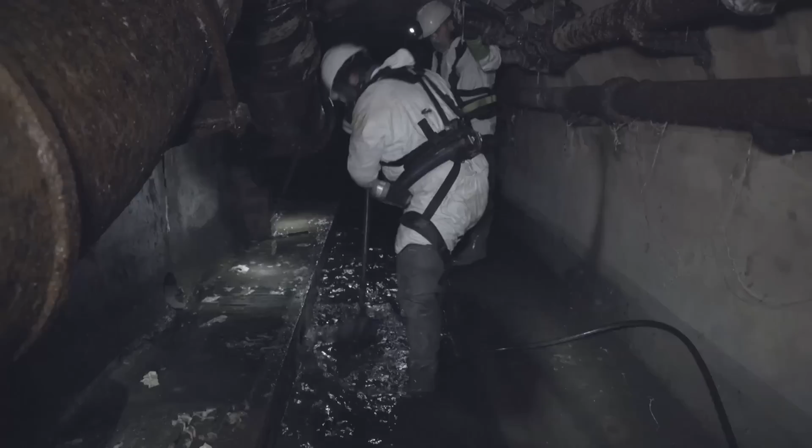But this huge infrastructure wouldn't work without the hundreds of men and women who contribute to its daily maintenance. This infrastructure, the equipment, but also the sewer workers, contribute to the development and the thriving of the city. They're invisible, key protagonists playing a part in the quality of our daily life. We're the guardian angels of Parisians and hygiene. Our job is essential. One should be proud of being a sewer worker. Every day, all the wastewater is discreetly transported and treated through the sewer system. This technical and human feat allows the City of Light to keep shining on the surface.